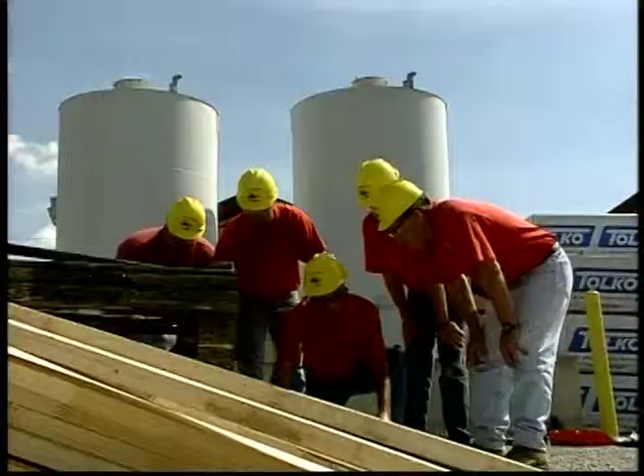The National Lumber and Building Material Dealers Association, the NLBMDA, has produced the Forklift and You to assist independent lumber yards just like yours in preventing a tragic scene like this. Forklift accidents not only cause pain and human suffering, but also can be a tremendous cost for your employer. Forklift accidents resulting in serious injury can cost from $300,000 to $500,000, and forklift accidents resulting in a fatality can cost up to several million dollars.

The only way to reduce forklift accidents is through an effective training program that informs all operators on the theory and procedures for operating a forklift. The training program must include both classroom and actual operational training on every forklift that will be operated by an employee. Your employer must ensure that all forklift operators have the capability to safely operate their forklift.

Don't you become a victim. Stay alert, pay attention, and make notes during this program. The life you save may be your own.

OSHA, the Occupational Safety and Health Administration, has regulations that govern the safe operation of forklifts in your workplace. These regulations can be found in OSHA's General Industry Book, Section 29 CFR 1910.178. Your employer always has a copy available for employees to view, and the regulations are given in the appendix of your operator's workbook. On December 1, 1998, OSHA published the long-awaited final rule on powered industrial truck training. This makes dramatic changes in the way forklift operators must be trained.

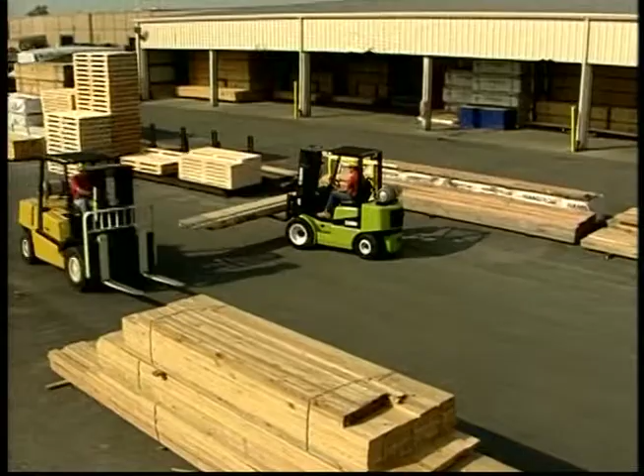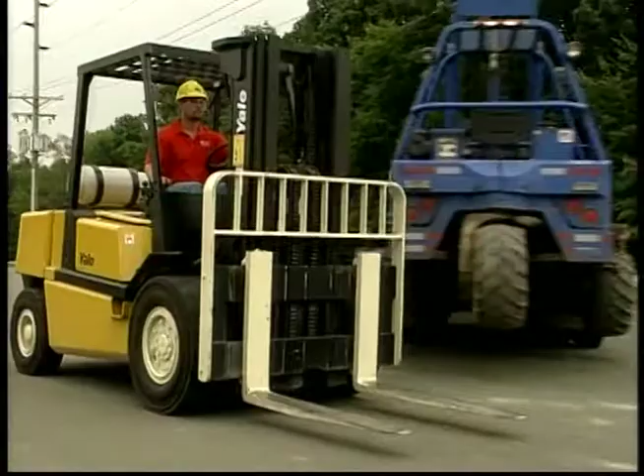With the thousands of heavy, bulky products sold in today's lumberyard, it's impractical to move everything by hand. Forklifts are used for efficiency and the safety of employees. This video-based training program will guide you through the basics of forklift operation and how those basics apply to the use of forklifts in a lumberyard. You should have your student guide close at hand as we travel through the sections of this program.

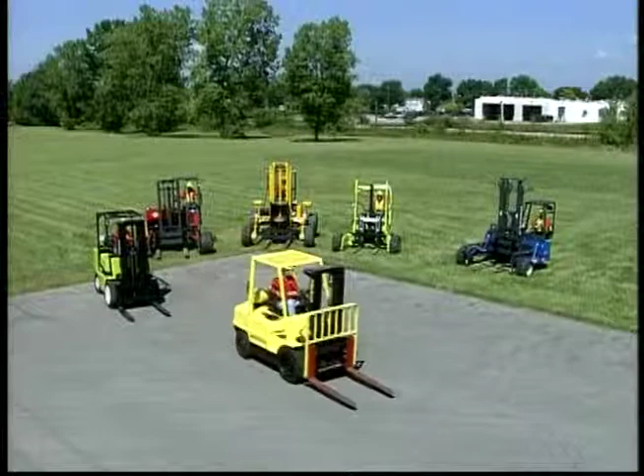The forklifts that are seen in this video may or may not be the same as what is found in your lumberyard. Remember that each forklift has specific operating instructions. They should always be consulted before operating any new forklift. In fact, OSHA requires that you be trained on every forklift you operate before you're expected to operate that forklift as part of your duties. These are the forklifts you'll be seeing in our video. Each forklift is different. We won't be showing you how to operate each individual forklift, but we will guide you through the general principles of safe, efficient, and professional forklift operation.

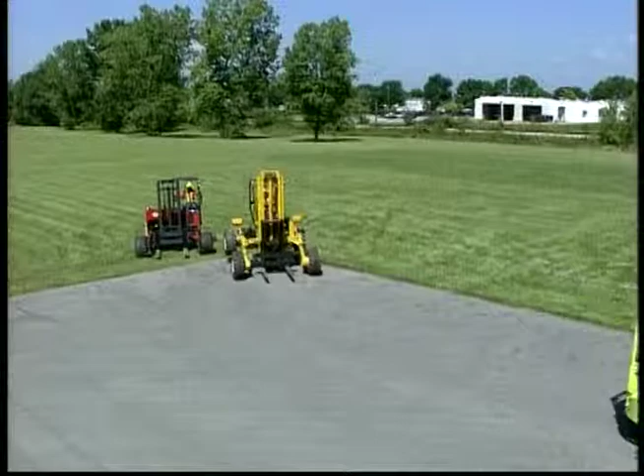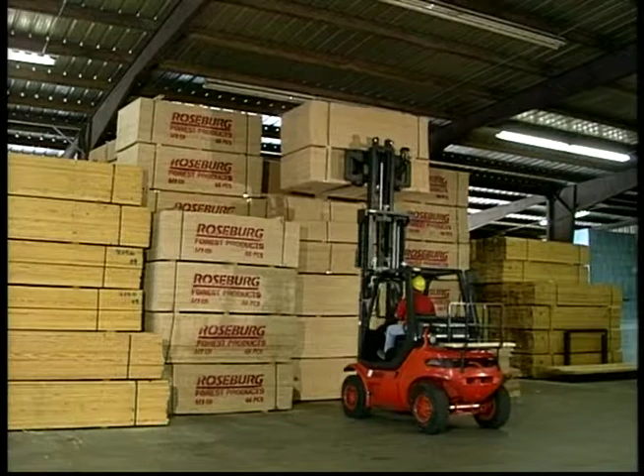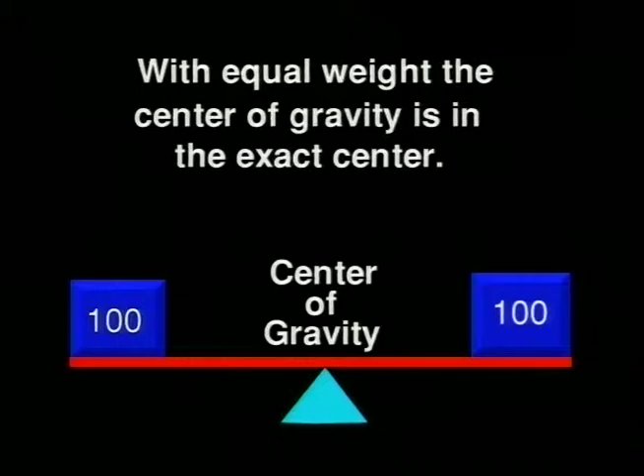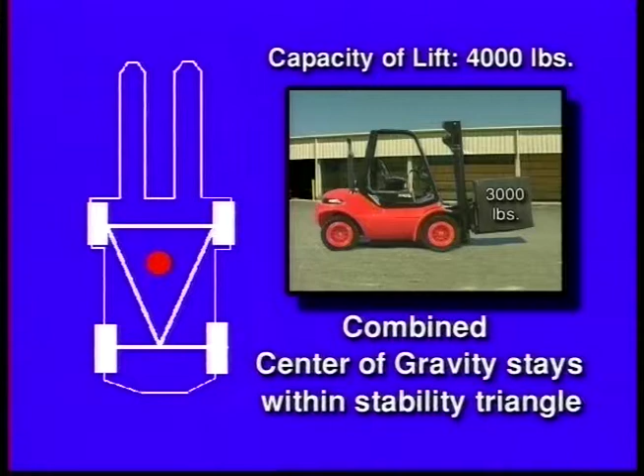Since forklifts are designed to be stable in their natural state, there must be something that causes them to get outside of the center of gravity and become unstable. As you see here, the forklift is not beyond capacity, and the combined center of gravity remains within the stability triangle. When we add more weight than the lift can handle, our combined center of gravity touches or moves outside of the stability triangle, and the forklift will tip over.

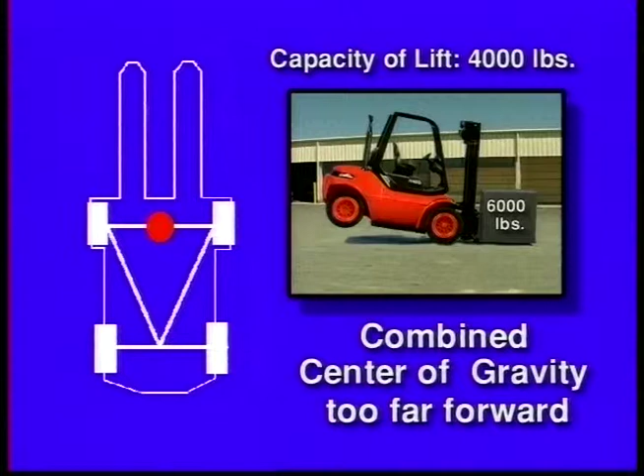Not only can the weight you're carrying cause the center of gravity to move outside the stability triangle, how fast you operate the forklift, braking, quickness of loading and unloading, and running on inclines are dynamic forces that can quickly change the combined center of gravity without the weight changing at all.

There are two basic types of forklifts: counterbalanced, as we see here, and non-counterbalanced, as we see here. A counterbalanced forklift has a very heavy weight added to the back of the unit. This adds counterbalance to allow the forklift to handle heavy loads without touching or going outside of the stability triangle. A non-counterbalanced forklift does not have a heavy weight at the back of the forklift. That is why it's called non-counterbalanced. A non-counterbalanced forklift brings the load above the wheels or between the wheels to keep the combined center of gravity within the stability triangle.

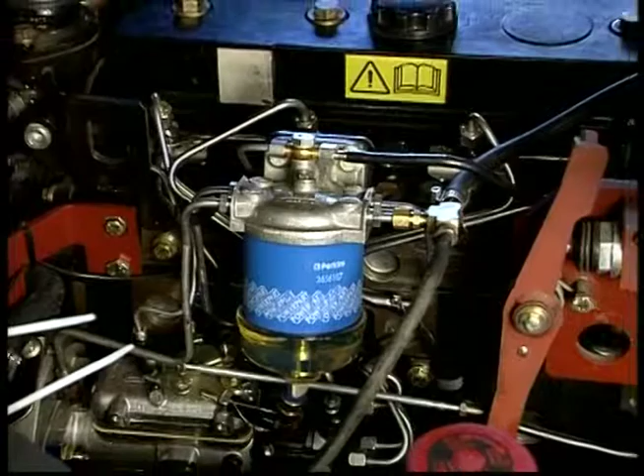There are several different fuel sources for forklifts. Here we see the diesel engine of a counterbalanced forklift. This is the engine of a counterbalanced forklift using liquefied petroleum gas, also called propane. This non-counterbalanced forklift also uses diesel fuel for its power source.

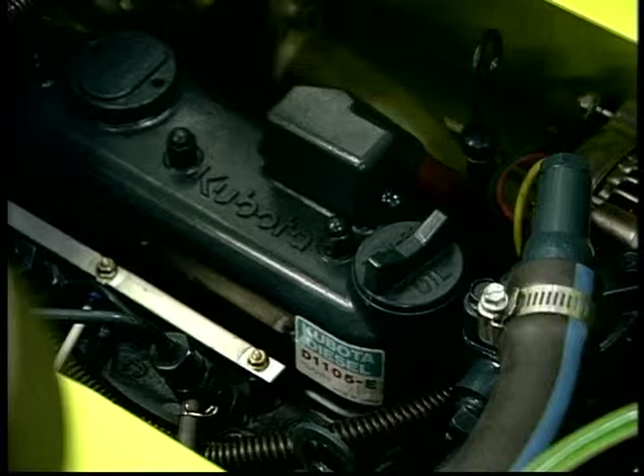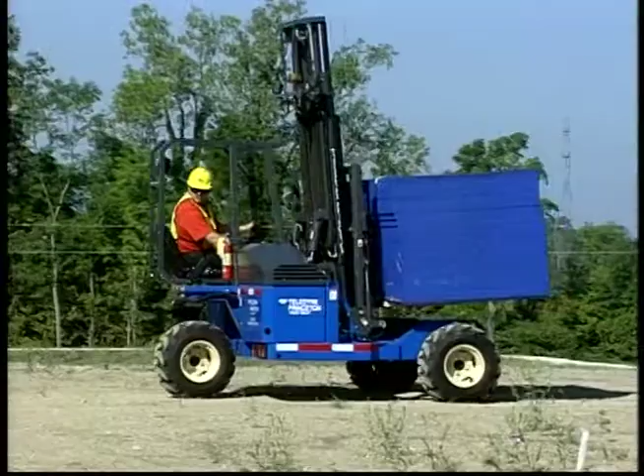We've now covered the principles of forklift operation. You should understand how a forklift handles those heavy loads. At the end of your day, you'll normally get into your car or truck to travel home. Forklifts are very different than a car or truck. After all, you wouldn't drive a forklift to and from work each day, would you? Your trainer should now stop the tape, and you may discuss the information we just covered.

In this section of the program, we'll look at what needs to be accomplished in a daily pre-operational checklist. In some jobs, employees can come in and start working hard. But a professional forklift operator knows that he must check out his forklift before starting a work shift. In fact, OSHA requires the forklifts you'll be using to be checked before each shift they'll be operated, even if they were just checked the previous shift. You must never use a forklift, even briefly, until the daily pre-operational check has been performed. A simple daily pre-operational checklist can help prevent potentially tragic accidents, as well as lost time and company funds.

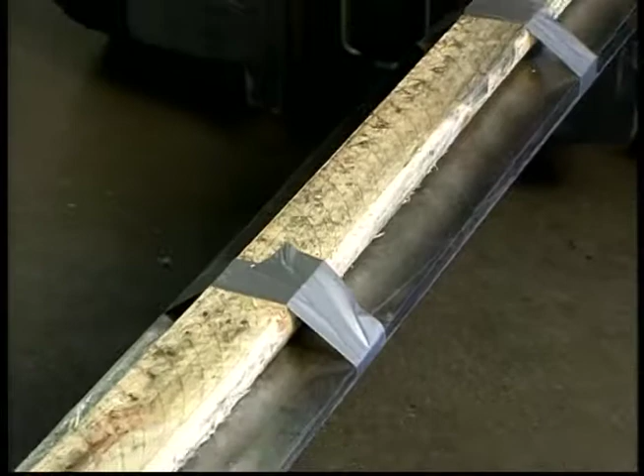A professional forklift operator knows that he isn't qualified to make mechanical repairs to his forklift. When repairs are needed for safe operation, always put the forklift out of service and remove the key until repairs can be made. The key should also be tagged out of service and given to the authorized person in your company to make certain no one can accidentally get to the key. Always call a qualified mechanic when repairs are needed. Make certain the mechanic is informed of all items that are deficient so complete repairs can be made. Only repairs authorized by the manufacturer or factory-approved repair service are permissible.

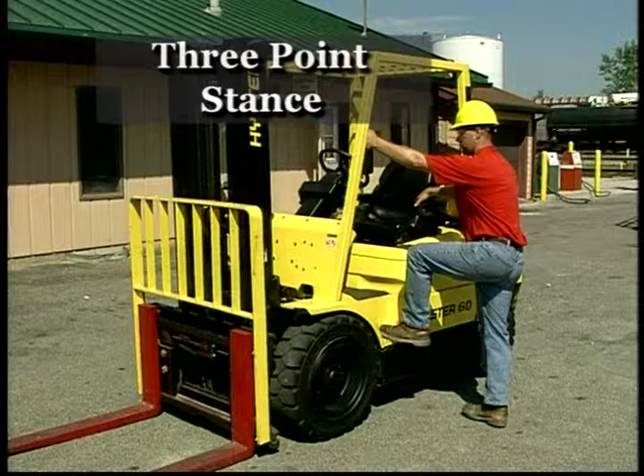This is a good time to remind you about how to get on and off your forklift. Always use the three-point stance. This means you should have at least 3 points of your body in contact with the surface at all times: 1 hand and 2 feet, or 1 foot and 2 hands. This applies for both getting on and off of your forklift. You may think jumping off will save time, but you never know what can happen. A shortcut may be a quick way to an accident. Now, let's get on with the checklist.

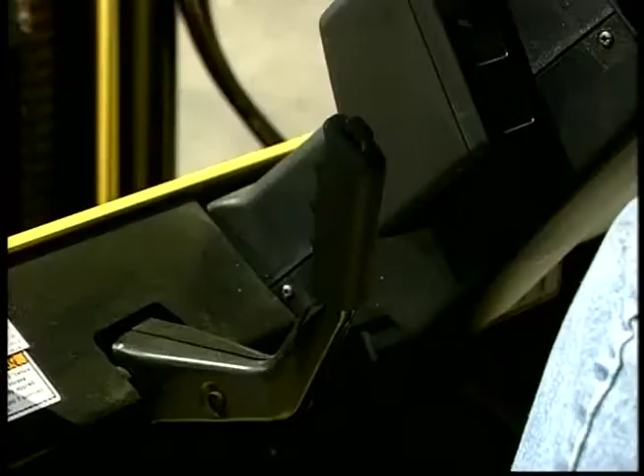Your daily pre-operational checklist is broken down into 2 main categories: visual and operational. First, make certain the key is not in the ignition. Next, make certain the parking brake is set. Then check that the shift is in neutral. Check all hydraulic controls to relieve any stored pressure. After making certain the surface is level, you may begin the checklist.

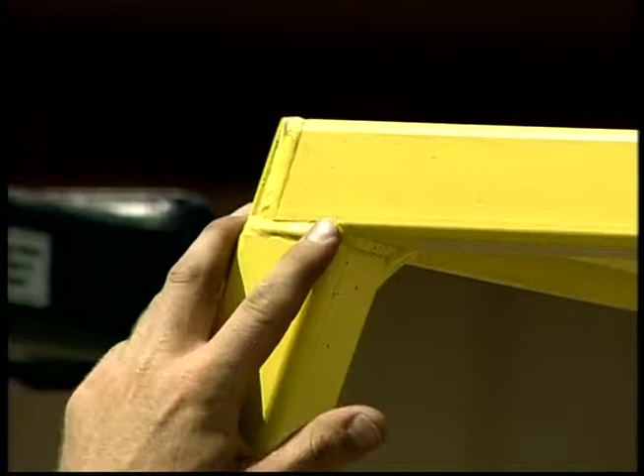First, check for any dings or dents to the body of the forklift. Always look at the rollover cage as you go. Inspect all portions for any damage. Look at visible welds and inspect for any breakage. As you work your way around the forklift, also inspect the tires. Run your hand over the surface of the tires to look for any pieces missing or foreign objects in the rubber.

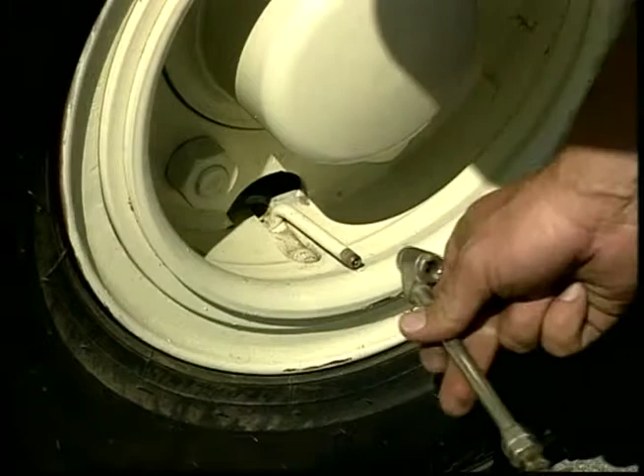Pneumatic tires should be at the manufacturer's recommended pressure. Always check the lug nuts to make sure they're secure. If there's any doubt, they should be checked with a torque wrench to the manufacturer's specifications. As you continue your inspection, look at the data plate. Make sure it's readable at all times. As you complete an item, check it off the list.

Always look for fluid leaks. Never put your hands or any portion of your body under the lift to perform this check. After the forklift has been moved, check the relative position of the leak and what kind of fluid may be missing. Check the seat for tears or rips. Although a rip in the seat may not always be cause to put the lift out of service, it should be noted on the report.

Always check the operator restraint device or safety belt to make certain it has no nicks, cuts, or foreign material. It should fully extend and lock into the receiver. Safety warning decals must remain visible at all times. OSHA requires an operator's manual to be readily available for use by the operator.

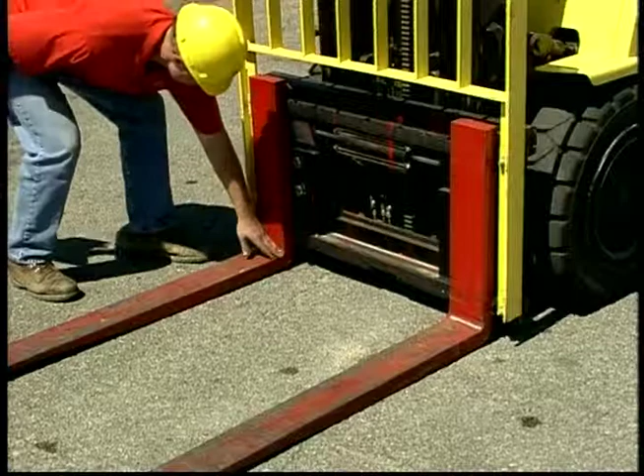Forks should be inspected for wear. If the back of the fork is worn 10% or more, the forks must be replaced. Consult the operator's manual on how to check fork thickness. Inspect the forks for any warping or skewing. Make certain the fork locks are operable and properly set. The stops should be in place and able to keep the forks from sliding off the bar.

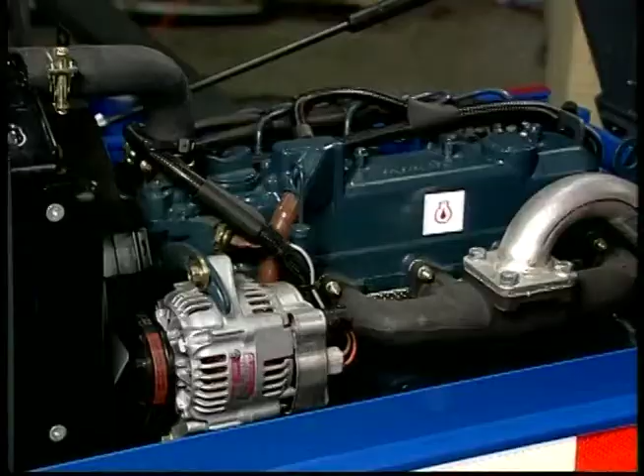Take one more quick look at the outside of your forklift. Some forklifts have openings or gauges to check fluid levels without opening the engine compartment. Check these fluid levels before opening the engine cover, and then open the engine cover to begin the engine checks. Check all remaining fluid levels. Also perform other required checks while the engine cover is open, including any belts. Add fluids as necessary. Make note of adding fluids so the person responsible for forklift maintenance can see if a forklift is using excessive fluids.

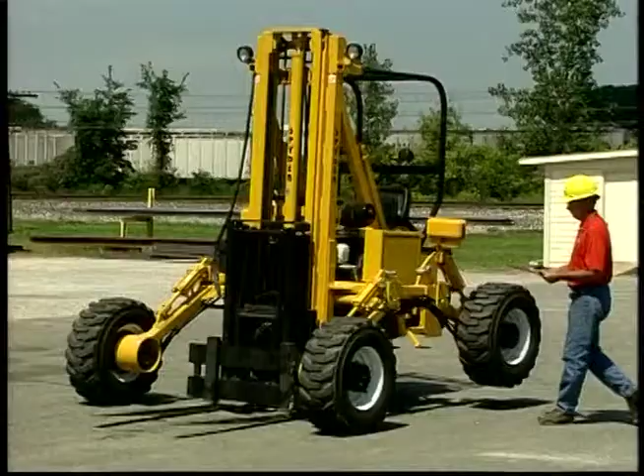You're now ready to shut the engine cover. Make sure the cover is secure. This is just a general procedure for performing visual inspections. Always consult the operator's manual for any special items that need to be checked on your forklift. Before we start the forklift, we need to check a few more items. Check the steering for play before starting the engine. All pedals and operating controls need to be physically checked for play and wearing.

Now that our visual inspections are complete, if there are no items that would prohibit you from starting your forklift, you may proceed. If the visual inspection shows even one item that would affect the safe operation of your forklift, then do not continue. Tag it out of service. Before placing the key in the ignition, always secure your restraints. Check all controls to make certain they're in the neutral position. Check to see if anyone is around you before starting the forklift. Turn the ignition key as per the instructions in the operations manual.

Listen to the sound of the engine. Does it run smooth or rough? As you rev the engine, does it continue to run smooth? Note any potential problem on your checklist. Check the steering for firm, safe turning to the left and then the right, and make sure you bring the steering wheel back to the straight position. Check the service brake for proper operation. It should firmly grab and stay in place.

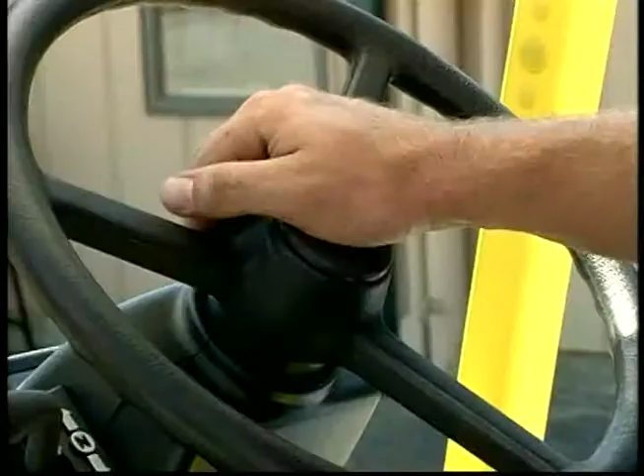Slowly put the forklift into gear and make certain the service brake will hold the lift without movement. After applying the parking brakes, slowly let off the service brakes to verify the parking brakes will hold your forklift. Check the horn for proper operation. This is considered a safety item. The forklift must not be used without an operating horn. Verify operation of the backup alarm. Verify your warning lights are working.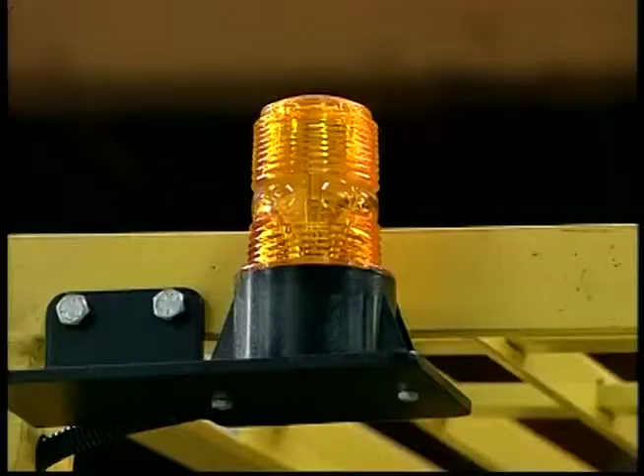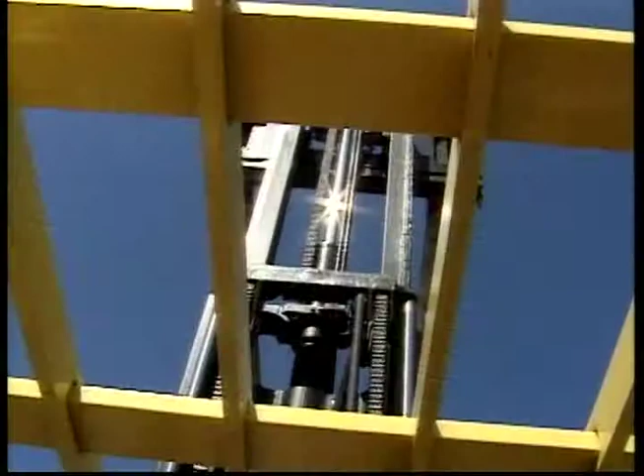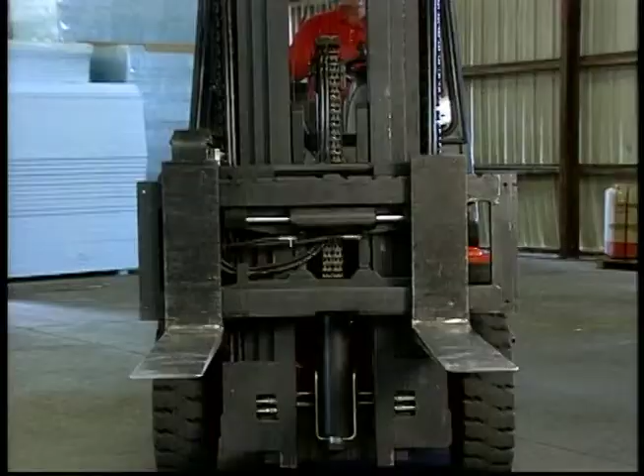After again checking for no one in the area, raise the forks slightly to check for operation. After checking for proper clearance, raise the forks to full height and lower. Note any problems with the operation. After lowering the forks, check the mast tilt in both directions. If your forklift is equipped with side shift, check it for proper operation.

After you've completed your operational check, turn off the forklift, set the parking brakes, and complete the checklist. Make any notes that may be needed on the operational items. If any safety items are defective, the forklift must be placed out of service until repairs are completed. Put the checklist where it is to be stored. You've now completed the daily pre-operational checklist for your forklift. Remember, every forklift must be checked before each shift. Once you've verified each forklift you may operate has been checked, you can begin operation.

If your checklist indicated fuel needed to be added, now is the time, before the engine gets hot for the day. Never smoke in or around the fueling area. Make sure a fire extinguisher is readily available. Your forklift should be turned off, the parking brake set, and the forks lowered. Always verify you're adding the correct fuel. Be careful you don't overfill and spill fuel.

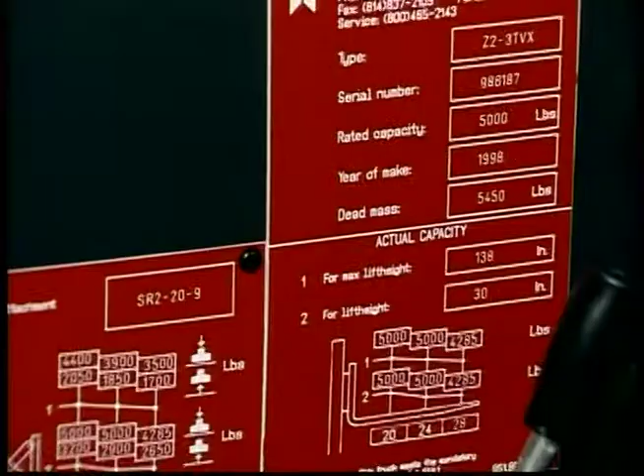Properly replace the fueling nozzle and make sure the cap is firmly placed on the unit. Never underestimate the importance of warning labels. They serve as constant reminders on what should and should not be done. In some cases, labels will even show you how to perform an operation. Be aware of what your labels say and where they're located. Missing or illegible labels should be noted on the checklist.

Your trainer should now stop the tape, and you may discuss the information we just covered.

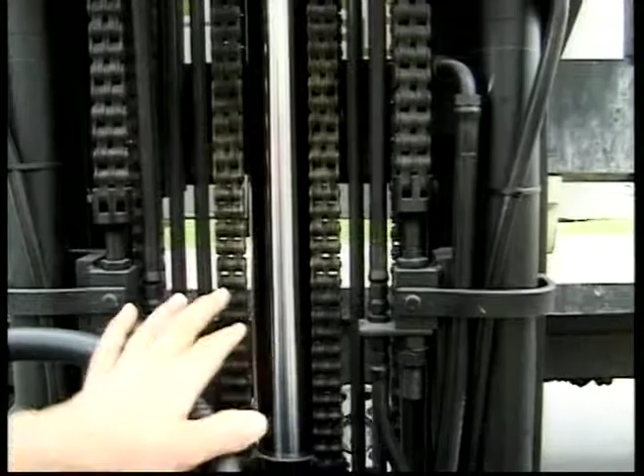This section shows the situations you may confront on a daily basis as a forklift operator in a lumberyard. Since you know the basics of forklift operation and how to perform the daily pre-operational checklist, we're ready to begin. Before you drive your forklift, check your work area for debris. If you'll be working in a small area, it can all be checked before starting. If you work throughout the yard, you'll have to check each area as you approach.

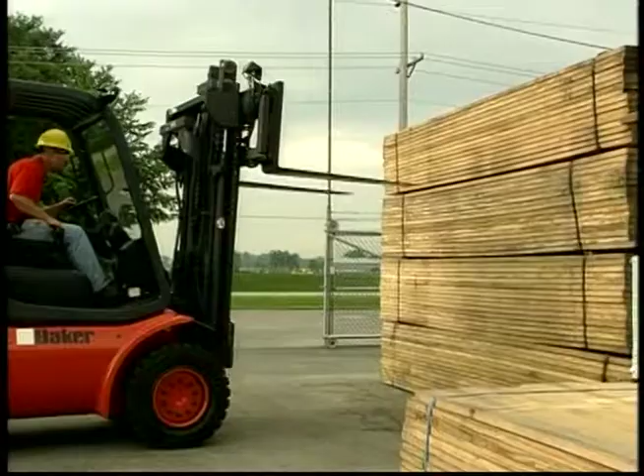When you come to something on the driving surface that could hinder the operation of your forklift, don't just drive around it. Pick up the debris and place it in its proper location. Now that you're ready to pick up a load, you must remember the correct procedures. Always approach your load squarely, with forks spread to the maximum amount that will still allow you to get under the load. If you need to spread the forks, make certain the forklift is turned off, the gear is in neutral, and the parking brake is set. Be careful that you never put your hands within the mast structure. Any sudden loss of hydraulic pressure could cause serious injury.

The mast should be vertical to ensure proper entry under the load. When the mast is tilted too far forward, you may hit the top of the load underneath and damage the materials. When the mast is tilted too far backwards, you may hit the bottom of the load you're picking up. Avoid hitting loads at the improper loading point. This can not only cause material damage, but can cause adjacent materials to fall, creating a hazardous situation.

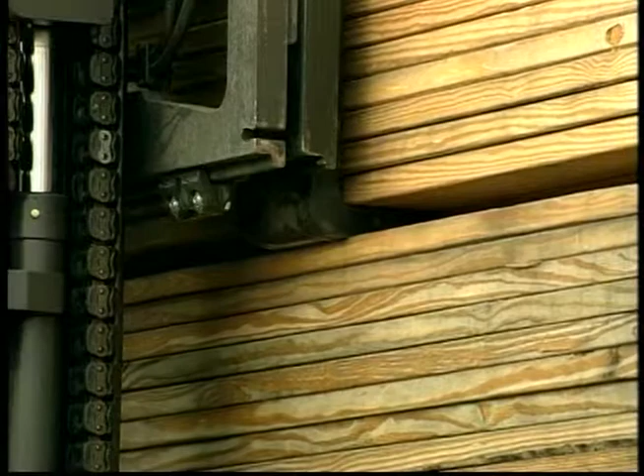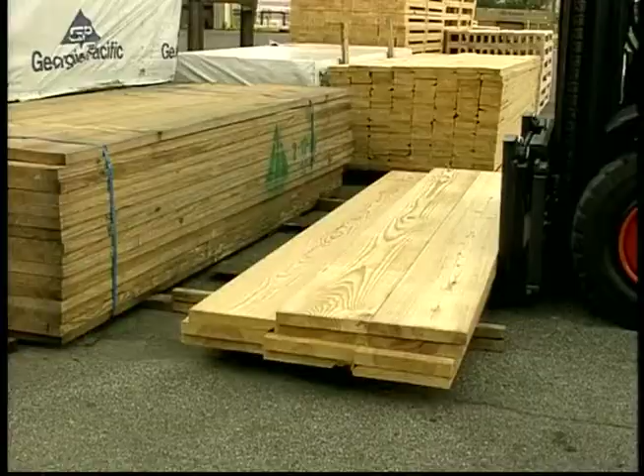Always place the load as close to the heel of the forks as possible. If the load is not as deep as your forks, be careful that you don't go all the way under the load and hit something on the other side. This can cause material damage and even serious injuries. After the load is to the back of the forks, slightly raise the load, just enough to clear the material below. You may now tilt the load, being careful you've cleared the material below with the back of your load. Once you're certain the lower material has been cleared, lower the load to a safe travel distance above the surface. Now you're ready to move your load to its intended location.

Let's look at another important part of operating your forklift safely: pedestrians. Pedestrians may not always be looking out for forklift traffic. When pedestrians talk, they may not be paying attention to things happening around them. Always come to a complete stop and allow pedestrians to move out of your way. Don't depend on them stopping for you. If people are in a place where you'll be operating, ask them to move to a safe location.

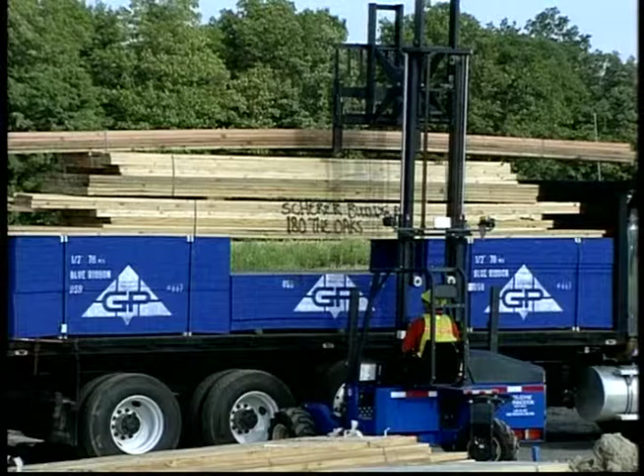Let's continue now by looking at some loads that may be unique to lumberyards. When moving very long loads, you must be very careful to lift in the center. Always lift very slowly. Check both ends to make certain they're lifting at an equal distance. If one end of the load is lower than the other, lower your forks and reinsert the forks closer to the end that is low. You may sometimes be lifting loads that don't have good lifting points. When stacking any cylindrical materials onto forks, make certain the mast is tilted to keep them from rolling. If you need to move several items, they should be banded together or somehow secured to make the load stable.

Now that we've lifted a few loads, let's look at how we place a load. Always check the area you'll be placing a load for debris, stability, and that it is large enough to receive the load. Some loads will require boards to be put down before you place the load. Make sure the boards are spaced to support the load and allow exit of the forks. Always make sure you have properly secured your forklift before getting off.

Just like when picking up a load, you need to approach the placing point squarely. Lift the load enough to clear what it's being placed upon. Stop just short of where the load will be placed to allow room for the forward tilt. Tilt the load level and adjust your location to the final resting position.

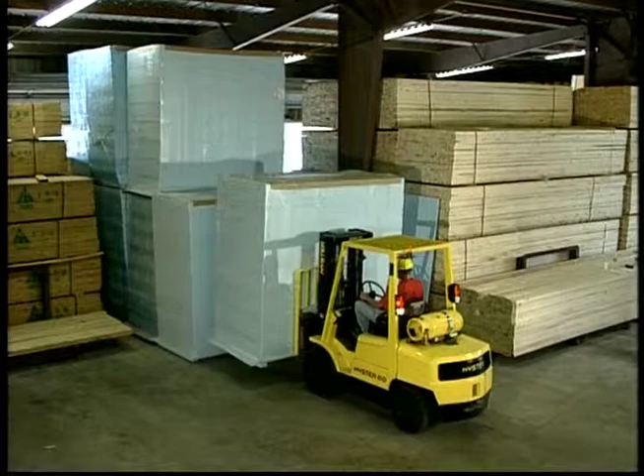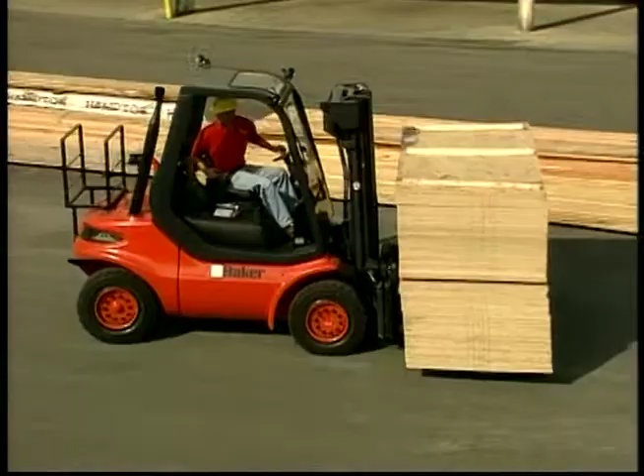Some materials are light in weight, but bulky to handle. Follow all previous guidelines for handling and remember one very important item: when handling loads that block your forward vision, you must always operate the forklift in reverse. Forklifts are made to travel in reverse for extended periods of time. In fact, some operators may spend a large portion of their day driving their forklift in reverse.

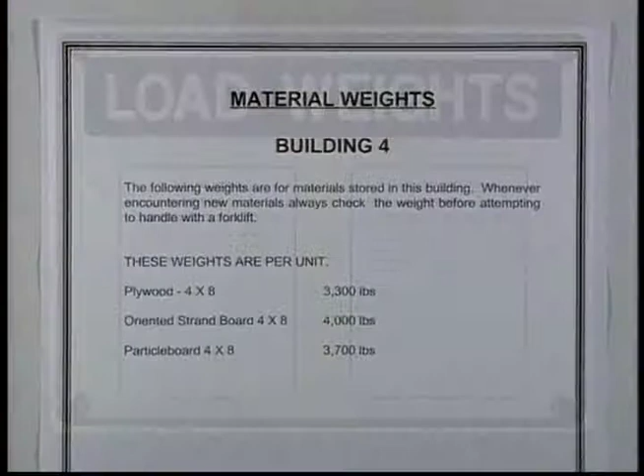Since you've checked the data plate on your forklift as part of the daily pre-operational checklist, you know the capacity, but you may not know the weight of your load. This operator knows it's smart to make certain his forklift has the capacity to handle any given load. Always check with your supervisor if a load you're moving isn't listed.

Many of you will be operating your forklift on a dock. There are several specific safety procedures required before driving onto a truck or trailer bed. First of all, the truck driver must set the parking brakes. After the parking brake has been set, you or the truck driver must put the wheel chocks in place.

Your lumberyard may have specific guidelines on how and where you should place the chocks. Many lumberyards place signs on the dock as a reminder to truck drivers and forklift operators. This sign is printed in reverse to allow a truck driver to read it when looking through the rearview mirrors.

After placing and securing the proper dock plate, the floor must always be inspected. Never operate your forklift on a floor that may not handle the weight. Finally, you may place your load. Always follow the same procedures when loading or unloading.

Forklifts are intended to hold only one person, the operator. Never allow riders on your forklift, no matter how many may want to ride.

Sometimes you may have to get a load wider than the opening into a building. This operator has found an efficient and professional way to handle the task.

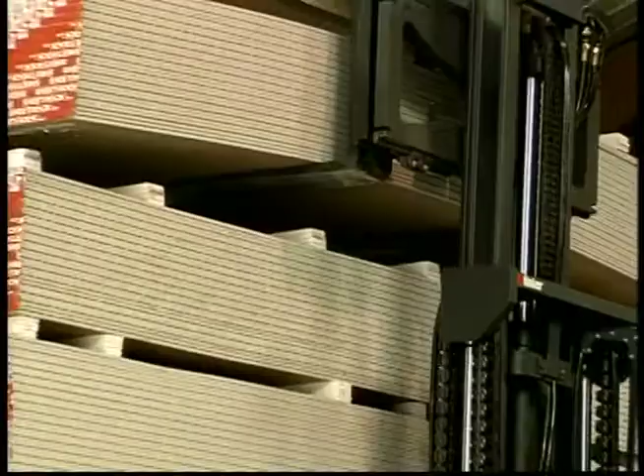Loading drywall can be tricky. Drywall comes in many different lengths, but 8, 10, 12, and 16 feet are common lengths found in lumber yards. Drywall requires special handling. It's not as durable as wood products. It can easily break or be damaged.

Handle the loads carefully. Use lumber or pieces of drywall for separation of lifts. Get familiar with how drywall handles on your forklift before attempting to lift larger loads. Even small loads can be difficult because they may not have enough support to keep from breaking.

Most lumber yards handle many types of roofing products. Rolled felt, rolled roofing, and shingles are among these products. Here we see shingles being loaded.

Pallets of shingles are quite heavy, but they can also be fragile. Shingles are easy to damage. During material handling operations, a single bump on the corner of a bundle could make the entire bundle useless. Proper loading, unloading, and handling of shingles will save thousands of dollars each year in a typical lumber yard.

A professional forklift operator knows that most shingles would only be stacked two pallets high. Stacking them any higher can cause material damage or, in some cases, personal injury.

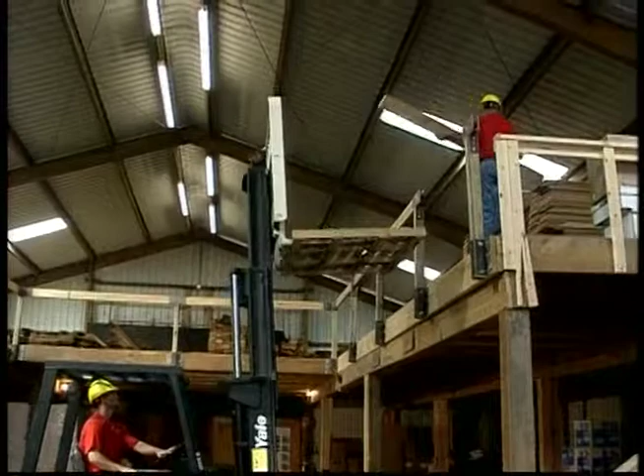Most lumber yards use every possible storage area. Mezzanines are found in the majority of lumber yards. When loading or unloading from a mezzanine, only remove the safety railings when operations are in progress. Always move the pallet or forks close enough so the person loading will not be put in any danger of falling. Replace the railing immediately. Know the load limits of your mezzanine and never exceed the capacity. Material damage, structural damage, and personal injury can occur if the mezzanine is overloaded.

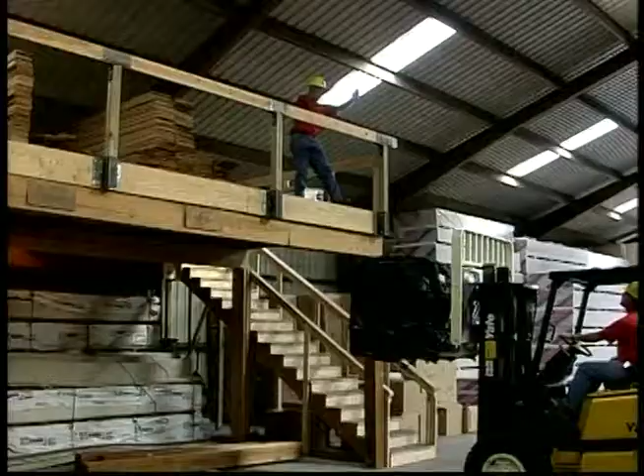Safe speed limits must always be obeyed in your lumber yard. You're not in a race. Most lumber yards don't have traffic cops checking for speeding. When you first learn to operate your forklift, you'll naturally go slower. As you gain experience, don't get so comfortable that you forget forklifts are not intended to be operated at even moderate speeds. Keeping your speed down will help make your lumber yard a safe, efficient, and professional place to work.

The goal of this program is to keep you from getting into an accident. Should an accident become unavoidable, there are some things you can do to protect yourself.

This operator is demonstrating one of the techniques for bracing. In this method, both feet are planted firmly on the floorboard, arms outstretched to firmly hold the steering wheel, and he leans back into the seat.

The second method of bracing again has feet firmly planted on the floorboard and hands firmly grasping the steering wheel, but the operator leans into the steering wheel. You may adjust the method depending on the style of forklift and your body size.

An efficient forklift operator knows just how to load a delivery truck to make unloading easier for the truck driver. Proper balancing of the truck weight must also be kept in mind. Unbalanced loads can cause the truck to become unstable while making turns. An improperly loaded truck will also be difficult to tie down.

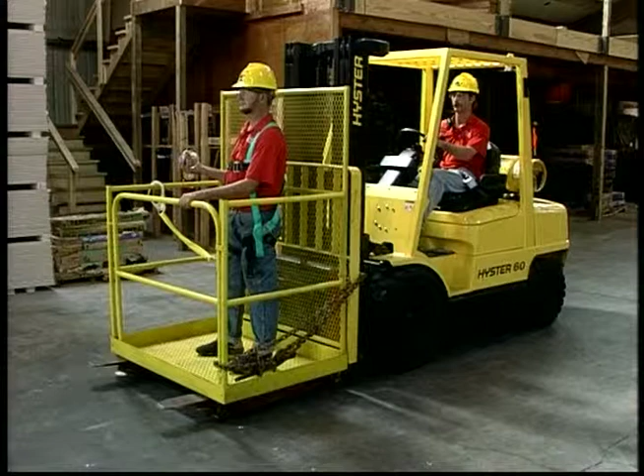Safety regulations on lifting personnel with a forklift may vary from state to state, but one thing is always the same: never lift anyone while they're standing just on the forks, a pallet, or any other load. A cage must be used that allows forks to be inserted. Some type of fastening system should hold the cage to the backrest. On this cage, a chain fastener is used.

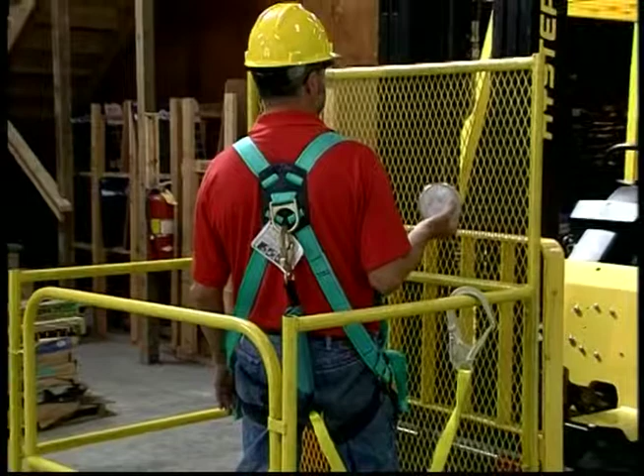Some states require the person being lifted to be secured to the cage. This is done using a safety harness and lanyard. Safety belts are no longer acceptable under OSHA regulations. Wire mesh or some other type of see-through covering keeps the person being lifted from accidentally getting caught in the mast assembly. The forklift operator must stay in the seat and watch the person being lifted.

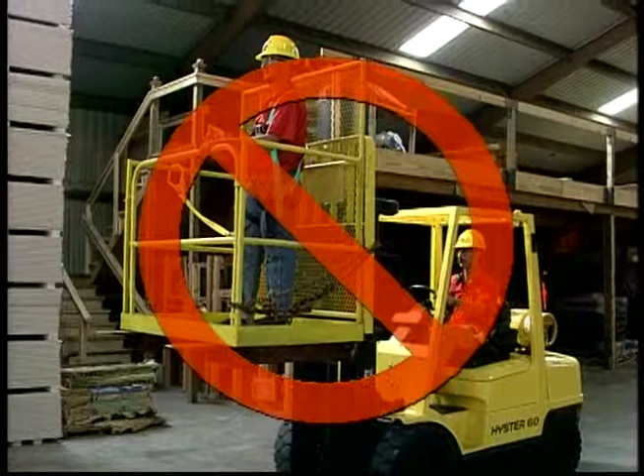If the operator has to get off the forklift for any reason or any safety problems develop, the cage should immediately be lowered to the surface. Never move a forklift with someone in a cage unless the cage is fully lowered to traveling position. That should only be done for short distances.

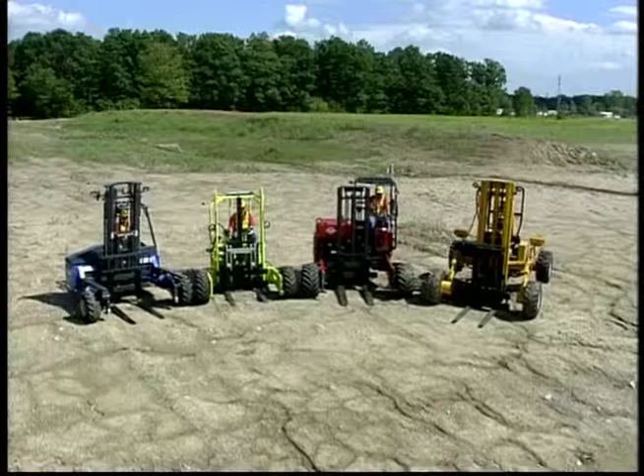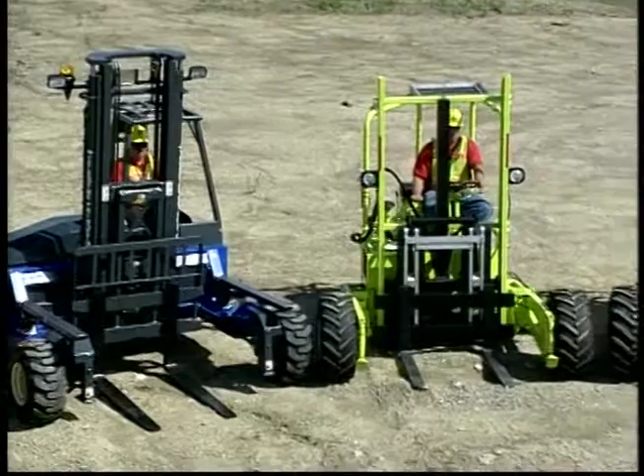This section will deal with truck-mountable forklifts. These are the forklifts you'll see operating during this segment of the training program. As you can see, there are many different styles of non-counterbalanced or truck-mountable forklifts. As with counterbalanced forklifts, you'll have to have training on any truck-mountable forklift that you operate.

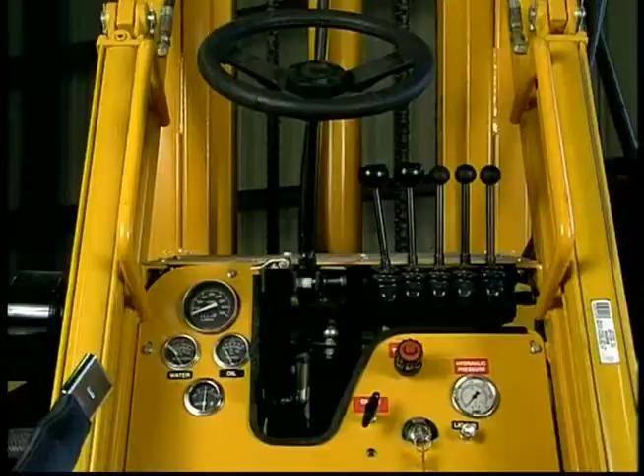It's vital that you understand how to read all gauges and operate all controls. Some gauges and controls on truck-mountable forklifts may look the same as with a counterbalanced forklift, but you'll also see some very different gauges and controls. Some can be basic, others may be more complicated, and some are very detailed with high-tech display panels.

Let's stop at a job site to see what procedures need to be followed. Safety is always the most important factor. As your truck comes to the unloading point, you should turn on your flashers.

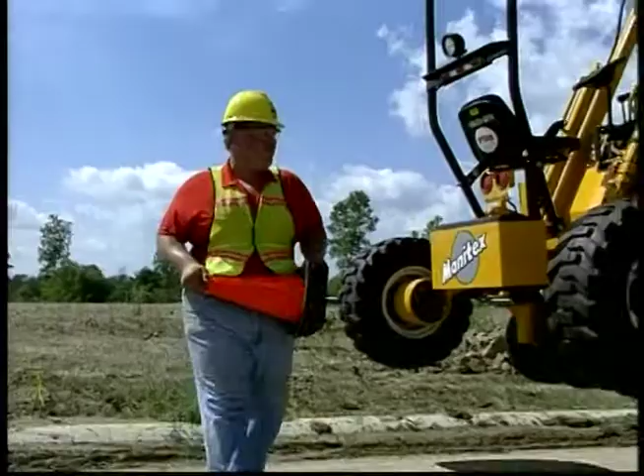The first thing to do is pick a safe unloading location. Before you walk into the street, always check for traffic. Place safety cones or barricades at a safe distance behind your truck. This will keep traffic away from the area you're unloading.

You must follow all of the basic procedures for safe forklift operation, whether in the lumberyard or at a job site. These operators know they must check the condition of their operational surfaces before driving on them. Look for debris that could cause an accident or damage tires. This also gives you time to determine where loads will need to be placed.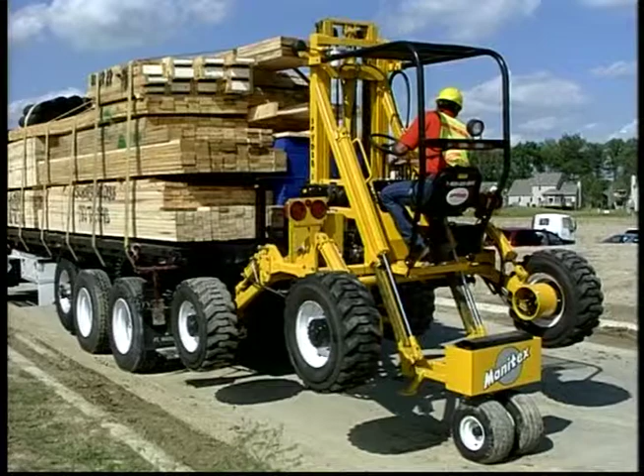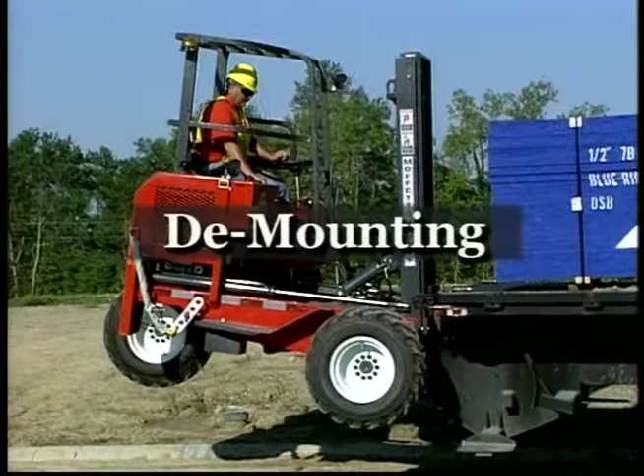Since counterbalanced forklifts are not intended to be mounted on the back of a truck, there are automatically some differences in operating procedures. Before you can use a truck-mountable forklift, it must be taken off the truck. This is a procedure we call demounting. All truck-mountable forklifts have slightly different methods for performing this procedure. The forklift operator's manual will give you specific instructions for demounting. Never take any shortcuts. You're working with suspended weights that need to be handled in a safe manner.

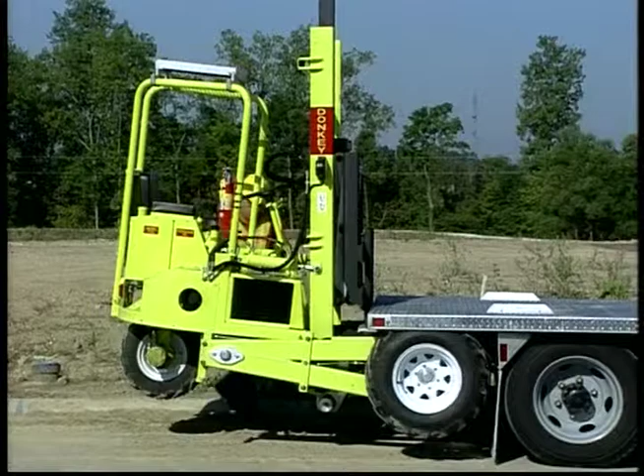Mounting your forklift is essentially the opposite of demounting. All of the exact same steps should be followed, generally in reverse order. You again must check the operator's manual for complete instructions. It's very important that all fastening points be checked once the forklift is mounted. Driving down the road could cause your forklift to come loose. Not only is there potential for thousands of dollars in damage, but a serious accident could occur if someone hits the forklift. Now that we've seen how a truck-mountable forklift is mounted and demounted, let's look at some actual operations.

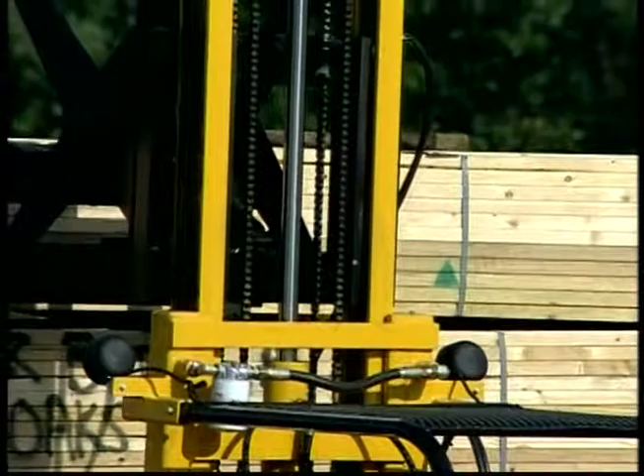Remember, there are some similarities between counterbalanced and truck-mountable forklifts, and some major differences. When picking up a load, your approach procedures are the same. When you're as close to the load as possible, a big difference emerges. Counterbalanced forklifts have their forks completely out front. Truck-mountable forklifts have the forks over or between the front wheels. To pick up a load, the forks must extend into the pickup point. When the load is lifted just above the surface, the forks can be brought back to their resting position. The load is then lowered for traveling.

Unloading with a truck-mountable forklift also has its similarities and differences from a counterbalanced forklift. As you approach your unloading point, you must remember one very important fact: the load will be positioned in front of where it rests while traveling. You must account for this difference when stopping. That means you'll actually be stopping short of the final resting position of the load. Once the load has been placed in its proper position, the forks can be retracted.

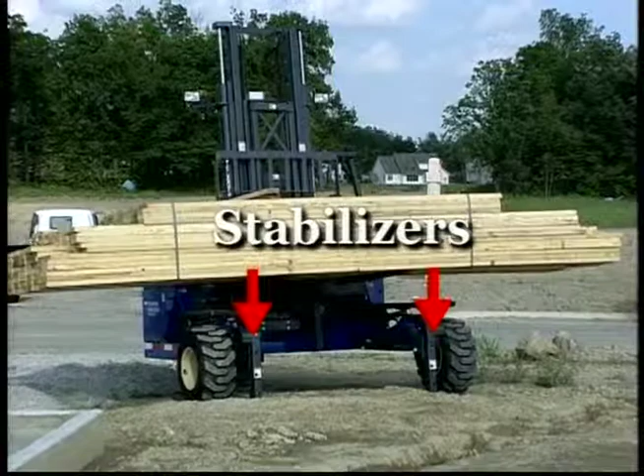Notice that stabilizers are used on most, but not all, truck-mountable forklifts. These stabilizers keep the forklift from tipping forward when picking up or dropping a load. If your forklift is equipped with stabilizers, they must be used during loading and unloading operations.

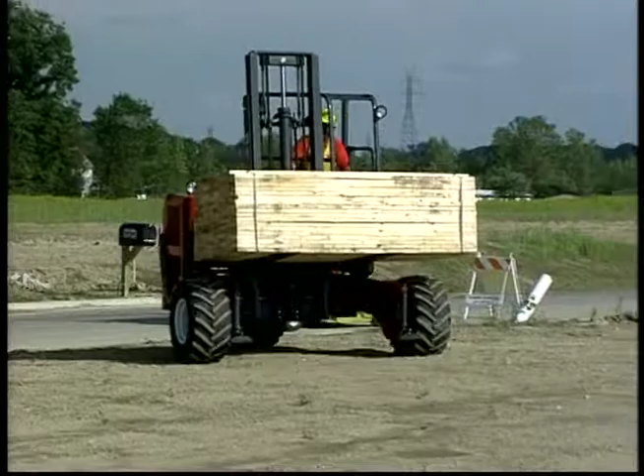Most truck-mountable forklifts will have less capacity than the counterbalanced forklifts you'd normally use in a lumberyard. You can generally handle the same types of loads, just not as much weight. You must always consider the job site conditions when traveling with a load. Since most job sites are generally only rough graded during the delivery stage, you'll have to adjust your speed accordingly.

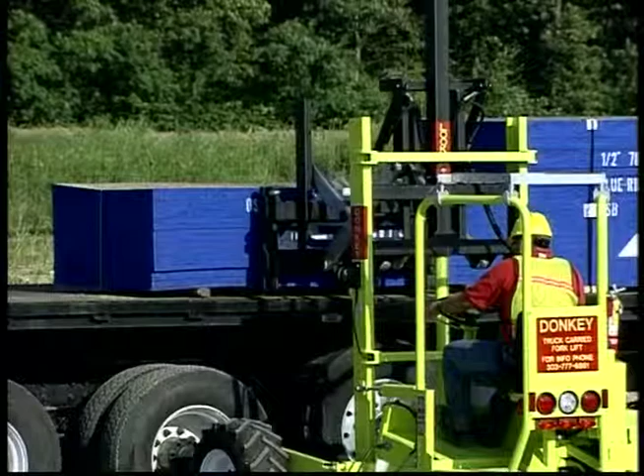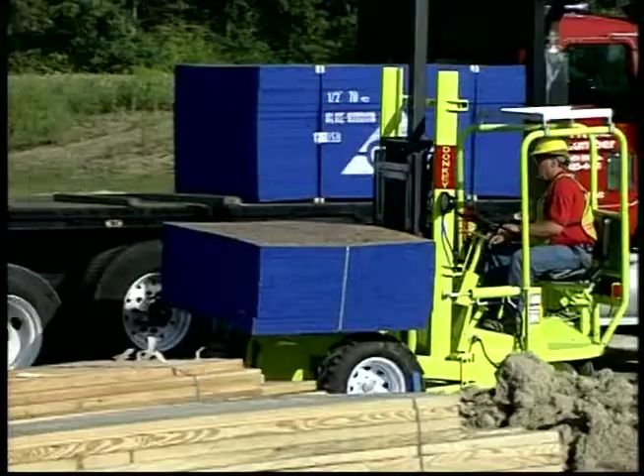Part of successfully operating your truck-mountable forklift may actually be accomplished by someone who never operates it. When your delivery truck is loaded at the lumberyard, weight capacities must always be considered. The forklifts in the lumberyard may handle 6,000, 10,000, or even 12,000 pounds. Most truck-mountable forklifts used by lumberyards will handle 4,000 to 5,000 pound loads. The lifting height also may be different. Your truck-mountable forklift may not be able to go quite as high as a counterbalanced forklift in your lumberyard.

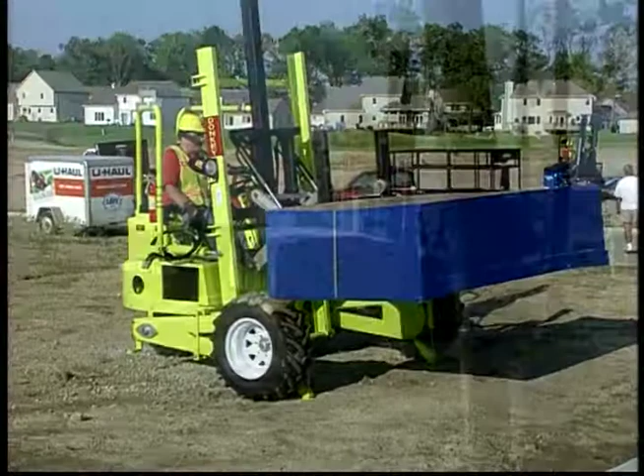Many operators have found out the hard way by having to return a load to be broken down. Some forklifts even turn their wheels for operation at a 90-degree angle. They allow you to take wide loads in a narrow space. This can be very helpful in tight job sites.

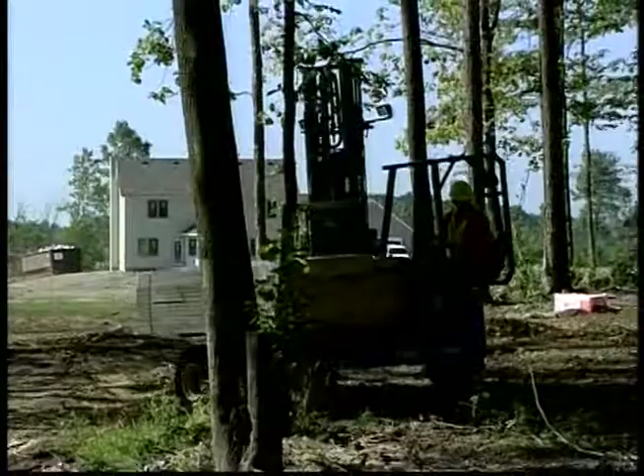This is a feature that requires thorough knowledge of how your forklift operates. You must first get used to normal operations. When operating in the switched traveling mode, all steering is done at a different perspective. You're still sitting in the same seat, but are steering perpendicular to the direction of travel instead of parallel.

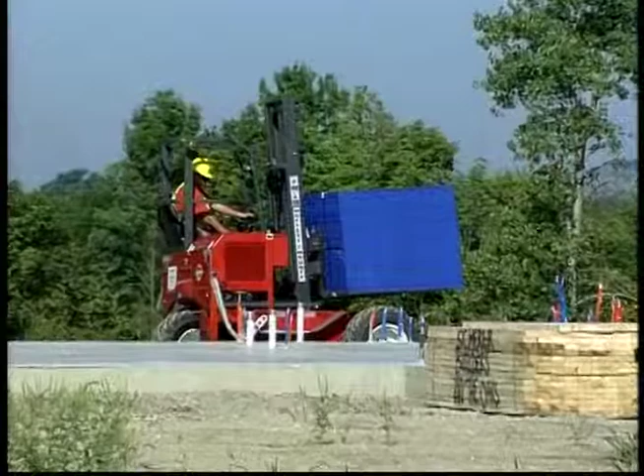Many lumberyards have found truck-mountable forklifts to be a valuable asset in handling materials at job sites. Operating a truck-mountable forklift requires you to constantly be aware of your surroundings. You may never deliver twice to the same job site, and even if you do, the conditions will probably be different each trip. Truck-mountable forklifts are intended to be used in a wide range of job site conditions. Some even have four-wheel drive for extremely muddy or uneven job sites.

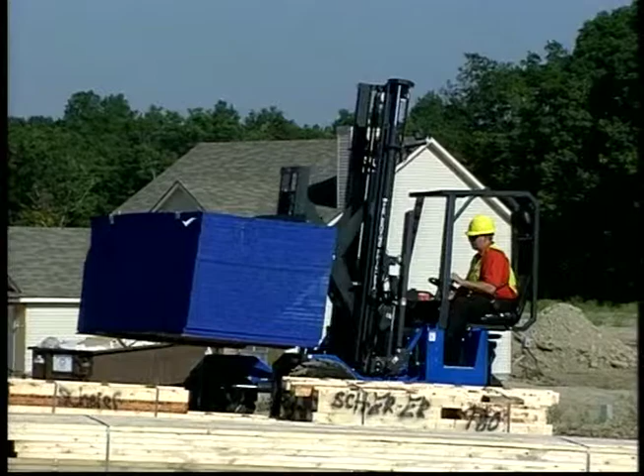Always watch for unseen traps that could create problems for your forklift. Recently excavated trenches can cause your forklift to get stuck. Even four-wheel drive forklifts may not get free. Overhead utility wires are sometimes not at proper elevations during construction. You not only have to be aware of what's in front of you, but also what's overhead and below.

We've now briefly introduced you to operations of non-counterbalanced or truck-mountable forklifts. Don't forget to read the operator's manual for complete details on how your truck-mountable forklift operates. Your trainer should now stop the tape, and you may discuss the information we just covered.

In this final section, we'll cover the steps that need to be taken for you to become an authorized forklift operator in your lumberyard. You're now completing the classroom or formal portion of your training. You've been using this video, along with your operator's workbook, to learn about how your forklift operates. To complete the formal training, you'll have to take a written test. This will help your trainer to understand if there are any areas that you need additional training. You must pass the written test before being allowed to go any further with the training and testing process.

Either before or after the written test, a trainer will give operational demonstrations on each forklift you'll be required to operate. Pay close attention during this demonstration. After the written test and demonstration are completed, you'll be given time to get familiar with the operation of your forklift. This is your opportunity to get to know your forklift.

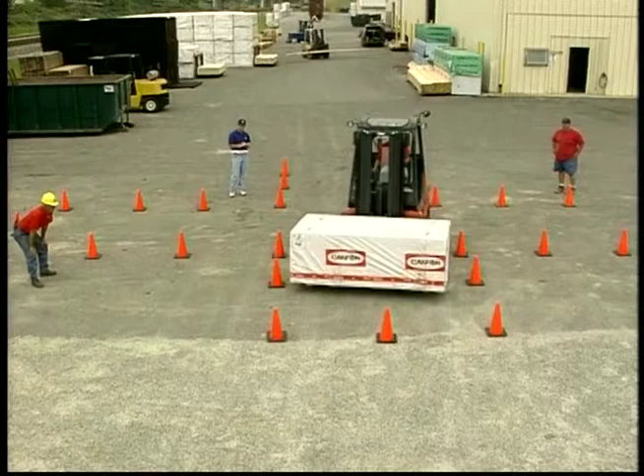After you're comfortable with all operations, you'll be put through a series of operational tests in an obstacle course. You'll be graded on your ability to complete these basic maneuvers. If you miss any safety procedures, you'll have to have additional training in those elements. Another opportunity to complete the course will then be given. If you show a lack of operational capability, you'll also have to go through additional training.

When you've successfully completed this portion, your trainer will allow you to move actual loads through the lumberyard. Your trainer will grade you on all aspects of your operation. You'll be asked to move different types of loads under situations encountered daily in a lumberyard. If you show a lack of operational capability at any time, your trainer will stop the evaluation. You may require additional training. After you've successfully completed the operational evaluation, you'll become an authorized forklift operator for your lumberyard. You'll have to complete some elements of the training program for all forklifts you'll operate.

The National Lumber and Building Material Dealers Association hopes you've both enjoyed and learned from this training program. Forklift safety is a vital part of your lumberyard's overall employee safety program. The owners of your lumberyard have made a commitment of company funds to outfit employees with effective material handling equipment. They're now investing additional funds in educating you to operate that equipment. With each day's experience, you become better at operating your forklift. You'll eventually be able to operate all controls and pedals just like your trainer.

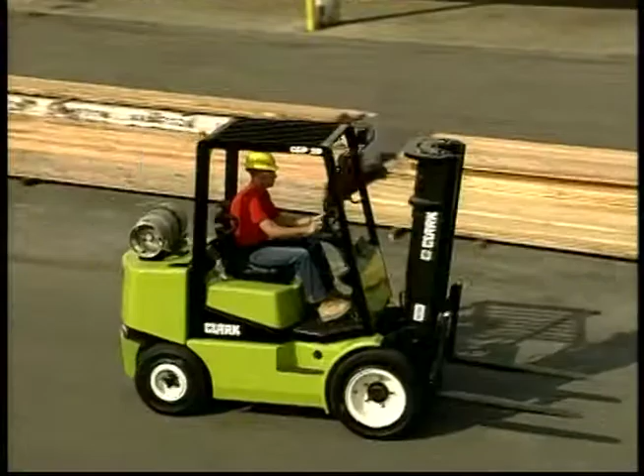Part of an overall forklift safety program calls for evaluation of operators at least once every 3 years. The evaluation helps to catch any bad forklift operating habits you may have developed. Additional training may be required any time you're involved in an accident or near-miss accident. Whenever new forklifts, attachments, or operating conditions are introduced, you'll receive training on those aspects. Congratulations! You're on your way to becoming a safe, efficient, and professional forklift operator.